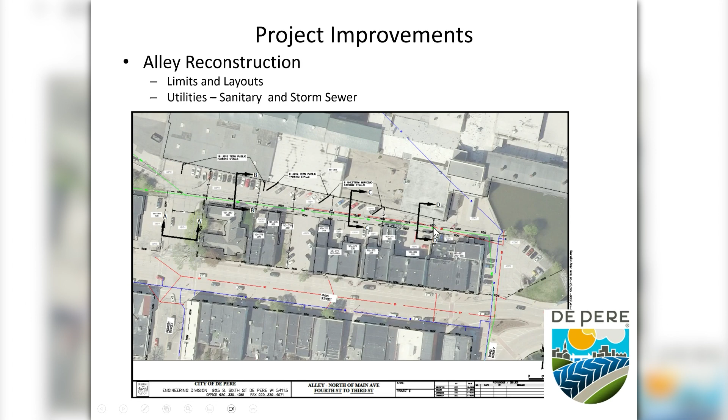Now, taking a look at the sections or viewing down the street, we've got a couple different ones, and the A, B, C, and D designate the locations of these upcoming pictures. But we're going to show you what we're dealing with from a right-of-way standpoint. So section AA is looking down 4th Street, fairly wide.

But section BB is one of the first sections behind the old library, viewing down the alley. And you can see our 12-foot right-of-way is showing the approximate location in black.

Really close to the curb along the old library and extending out into the pavement. So if we look at this as strictly reconstructing only 12 feet wide, you can see there's a lot of pavement we're not touching as part of the project.

Again, some of these we have lease agreements and things with the paper mill for parking, particularly along here. But when we get farther down, we don't have any easements or agreements for the parking on the south side of this alley.

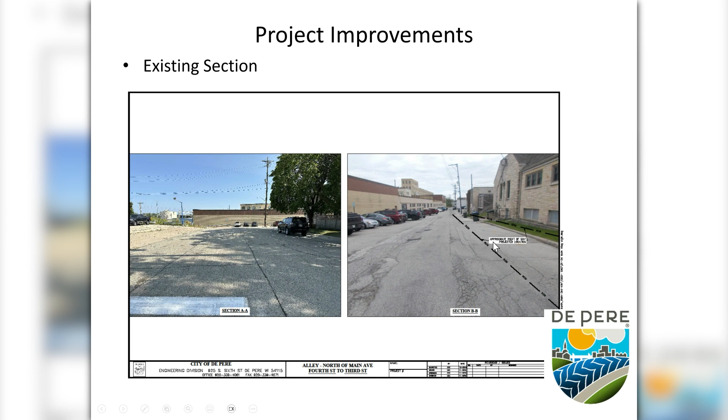Going down to the next, we're farther down mid-block, and then also when we get near the end of the mill towards the river. But again, you can start to see the right-of-way lines up pretty close to the backs of some of these buildings, extending partway out into the alley 12 feet.

In fact, the storm sewer where it's shown, if you go in the back where there's an inlet back there, that is outside of the easement or outside of our right-of-way. And there's a lot of pavement between our alley and your buildings.

So really the scope of this project is going to be dictated by the type of input we receive from the property owners and the businesses.

As I mentioned, we're going to be asking some questions. How do you use this? Are you looking at improvements in the future, maybe outdoor seating or things like that? Are you looking for pedestrian facilities? Are you looking for better lighting? And all those things come with pros and cons.

For us, if we're going to put in pedestrian facilities, we can't fit them in a 12-foot right-of-way without impacting the ability to drive. So we would need easements and agreements and things like that. And when we talk a little bit about dates, how elaborate this project gets may dictate how quickly this project goes. So those are some of the things we wanted to talk about today.

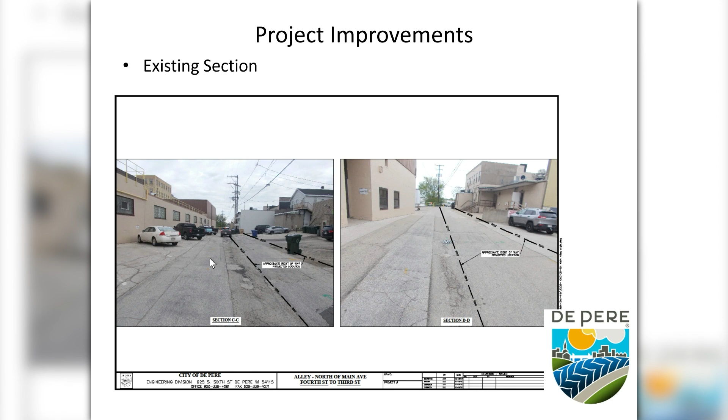So I mentioned a little bit that we are also talking about storm improvements and assessments. What we would be looking at is improving the storm, which I talked about runs in this low area, and then extending storm laterals towards your property. How far, we would have to work out with the property owners, but those things are assessed for. We want to present those up front so there are no surprises.

An assessment for the storm sewer—we only assess for the new storm sewer if we have to put new storm sewer in, and/or the storm laterals. So if you only have a lateral, and you've got storm sewer in front of your property, we would only assess for the storm lateral. If your property is already connected to the storm sewer somewhere, either behind the building in the alley or in front on Main, because there is storm sewer on Main, you would have no assessment.

We would not replace the lateral as part of the project if it's in good condition, and we would not charge you for it. That's something you can coordinate with staff on as this project starts to move forward and we know which direction we're going and how quickly it's being constructed—we can work with you and determine if you're hooked up or not. So that's something we can work with you on.

Now, as far as the storm assessment payment goes, with storm assessments we have a couple different options. When the project occurs—say, for instance, it went in 2025—at the end of the year, when the project is done, we would send you an invoice. At the time the invoice is sent out, if you want to pay it in full without any interest, you have to pay it within 30 days.

If you don't want to do that, there are payment plans. We have a 10-year payback option, 10 annual payments. Now, the other situation with this assessment is there's a long-term payback option. If you choose not to hook up to the storm lateral, and your building does not create icing problems from roof drains or sump pumps, we do not mandate hookup.

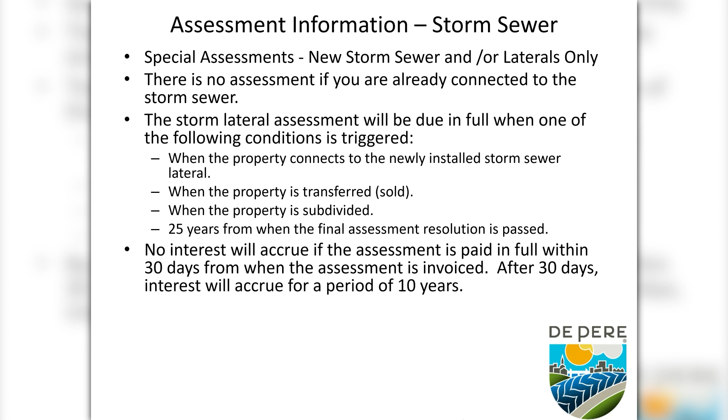So that is one of the two costs associated with the project. And before I continue on and hand it over to Scott to talk about dumpsters, because we are proposing a dumpster improvement with this project, I want to emphasize that the portion for the street improvements is not assessed. The sanitary lateral improvements that are made are not assessed. And then in a little bit, we'll also talk about water, because the water is located out on Main. Those are not assessed either.

So really, there's two assessments we're dealing with on this project: the storm, and the one that I'm going to turn over to Scott now to talk about, which is the dumpster enclosure construction. So Scott, I'll turn it over to you.

So what we're talking about on this alley project, over the last 6-7 years, the city has actually been installing dumpster enclosures in the downtown areas. This one right here is in the alley, a brand new alley we constructed recently between 3rd and 4th. I call it Cobblestone Alley because it was part of the Cobblestone project. The intent with these enclosures is we want to get rid of the unsightliness of the existing polycarts.

We've installed these enclosures. Our very first one we did was on the Nicolet Square parking lot. That was kind of called the pilot project. So those properties on the south side of Main between 3rd and 4th have been using that enclosure for, I believe, 6-7 years.

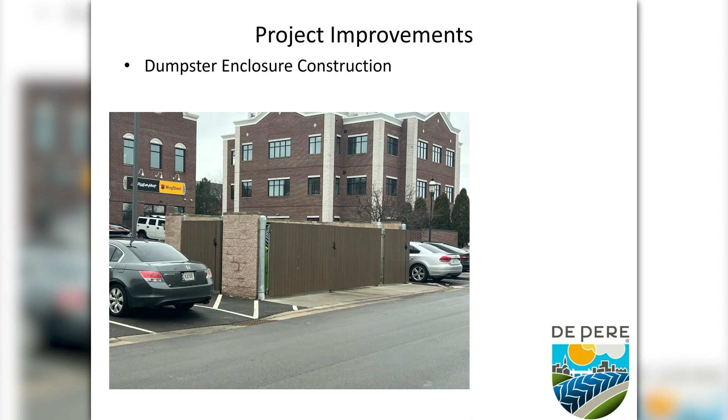What happens is, we build the enclosure and then we assess the property owners on an annual basis depending on their uses. We'll talk about that in a minute. So our goal, this is, I believe, Mill Alley will be our 5th area where we installed an enclosure. We have one right now at Nicolet Square.

Our second one we installed was Marquette Square. The third one, as you saw in a picture, was the alley between 3rd and 4th. We actually are in the process, and had information meetings earlier this year, we'll be constructing an enclosure on Mission Square. That's an area where Walgreens is.

And like I said, we're proposing this over the next couple of years when that actually does occur. Basically, what will happen is when we install that enclosure, we'll contract collection services with our private hauler. The city will administrate the garbage and recycling collection. Right now, I believe it's twice a week in most of the places that we have.

We also look at installing the enclosure large enough. If you're in an area where maybe a bar or something needs a larger container, we would actually construct it for that. Basically what we do is, for example, if a property owner wants to opt out, that means they have the ability to have services and store either carts or dumpsters on their own property. So basically they opt out, and then the city does not collect from it. It will be required to go private.

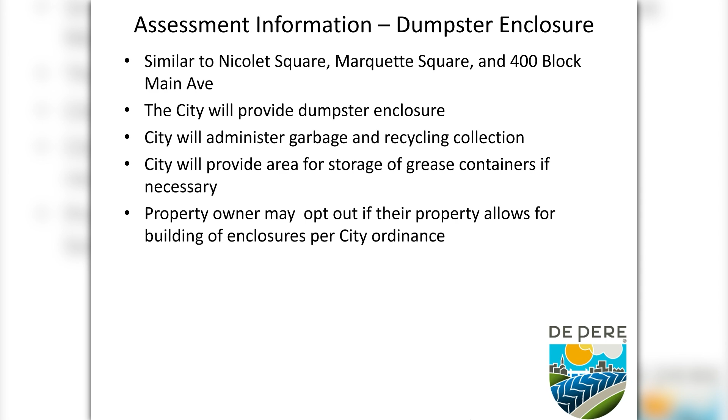An example, in the Nicolet Square area, I believe Pasquale's is one property owner. They have enough room that they opted out. I believe also the movie theater, for example, on Marquette Square, they opted out because they don't need it. So what will happen as part of this process, as Eric and his team are planning, I'll be working with them. We've got to figure out a strategic location to install the enclosure.

Potentially, it's going to most likely require a loss of parking stalls. I can tell you, in every instance where we install them, there were 2 to 3 stalls that were lost.

The toughest part is getting agreements on where we can put it and what'll work, then the issue is people actually using it if it's on one end of the parking lot versus another, or even the middle. There was a lot of debate in Nicolet Square. We were looking at two enclosures because of the bars and everything that were there. Where it went is pretty much behind the meat place, the market. It came to an agreement with all the property owners there, because at one time there was a business there, a bar at the corner of 4th and Main. They had to haul their garbage and walk it all the way over to that enclosure, quite a distance.

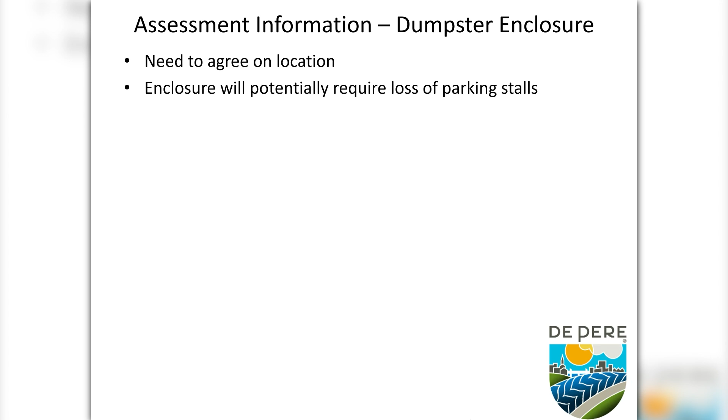An example right now on Marquette Square, we use George's. They walk it all the way to the north end of the parking lot. So there'll be some sacrifices on that.

So what will happen as we move forward and it gets constructed, we will have to revise our ordinance. We have an ordinance particularly for this type of application for a downtown area. You can see right now what we have up there is Nicolet Square, Marquette Square, and the 400 block of Main. We'll be adding Mission Square later this fall. Then as part of that ordinance, the Director of Public Works has to assess an annual assessment that goes on your property tax.

For this project, we don't know when that'll be because it all depends on the project. I'll give you an example: on Mission Square, it's not going to be done until probably late summer, early fall. So really the services won't start till 2025, and they'll go on our '25 property taxes.

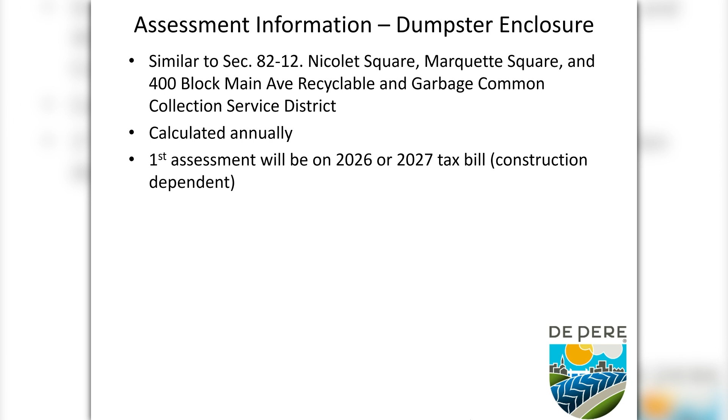So we got a little taste on the next slide, giving you an idea what the assessments will be annually. There's really two different types of assessment: those that have an office space, and now everything, you know, you might have a parcel that has maybe 3 or 4 uses, and say one use is a bar or a drinking establishment or a restaurant, then you get the larger assessment. In this case, for 2024, for those going out this year, the highest is 983.53.

And if you're an office building, such as you are, Ellie, because I think O'Connor has it on the south side, their assessment is 161.98. In fact, I believe she's on this one for the Nicolet Square.

So what will happen is as we build more of these enclosures throughout the city, it all goes in one pool. So everybody's going to be paying the same assessment, whether you're on the east side, the west side, in Mission Square, Marquette Square, or Mill Alley. Basically I throw all these parcels together, and everybody's paying the assessment.

Annually, I update them because, for example, if a restaurant bar moves out of a parcel - I say a parcel because a building like on the south side of Main between 3rd and 4th may have a restaurant bar, but there's also a couple of apartments or even office space - it's basically based on what the use is, office or a restaurant type bar. So there are some of these establishments that change hands and are no longer a restaurant type bar. There's an apartment instead, or they might be a gift shop. Well, then they actually will get a lower assessment.

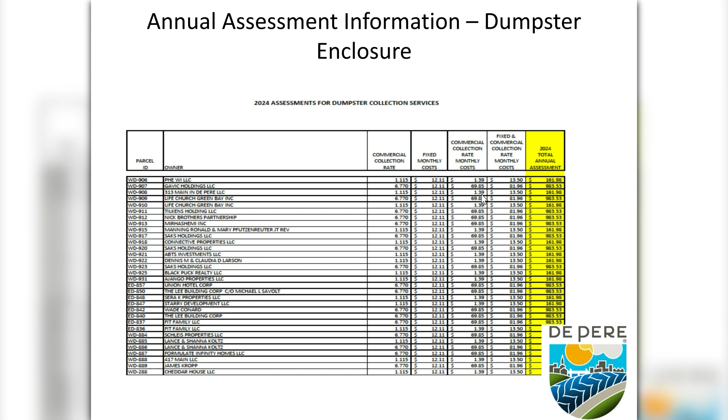All right, thanks Scott. So we're going to take a step towards the timing of the projects now.

So we just talked a little bit, in general terms, about the scope of the project, and then we'll talk more about the improvements with the dumpster enclosure and the two charges that are out there for this project.

But next, let's talk project timing. Quick overview: we've got a couple different projects which are the catalyst for when we want to get this alley done. Really, we're looking at this alley in either a 2025 or 2026 timeframe. 2025 would be if we just go with a 12-foot reconstruct on the pavement and we don't get to pedestrian facilities, or there aren't a lot of other amenities added, and we don't need to get easements, because as soon as we start having to get easements and rights to get onto property, things get more complicated. If that were to occur, it'd be 2026.

In preparation, we're going to have the Main Avenue utility relay by the city of De Pere in 2027, and then the big one, Main Avenue Reconstruction, in 2028.

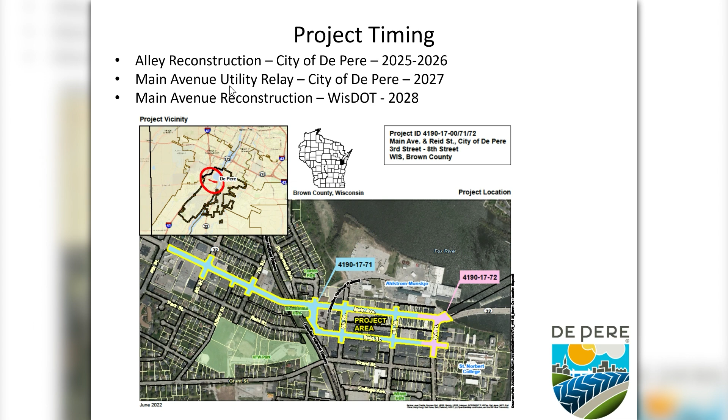I'm going to elaborate on those two other projects. So, 2027 utility relay: the year prior to the WisDOT big project in 2028, the city needs to come out here and redo our utilities. For those of you who have been in the area a while, it would be similar to 8th Street in the 2016-2017 timeframe.

In 2016, we did our utility work and put temporary asphalt patches down. In fact, I can still show you on our aerial maps what it looked like after we were done. And then WisDOT came in the year after.

On this project, you can see here's the area on Main that's impacted by the alley behind it. But in front, that's where your water main comes from. So we are proposing — there are curb stops, little metal caps for each of your buildings, out in the brick area — to relay those in 2027 to get into your building.

There will be quite a few meetings on that separately, because we'll want to work with your plumber to get that water service into your building so you don't have to deal with leaks or things like that in the future. But with that being said, during that timeframe, there's going to be impacts to traffic and impacts to people accessing your buildings, particularly when we're digging into these buildings.

Now, this project goes from the bridge all the way to 8th Street. So there'll be a lot of time we're not working in front of your building, but you can see there are quite a few services on this block. So there will be impacts in 2027.

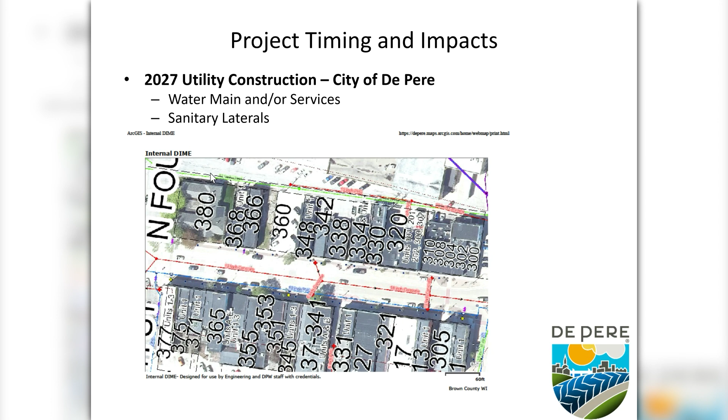Then comes the big one, 2028, and there are two different scopes to the DOT project. The area in blue, which encompasses at least half of your block, is going to be a significant impact — basically pavement replacement, decorative concrete, or whatever the city and community members come up with, and sidewalk replacement from building face to building face, which will make access into buildings very difficult during that time. This project is going to take the entire summer, I would anticipate.

Then there's a purple area, or pink area, depending on your color preference — I guess it's more pink — that's going to be more of a pavement rehab, because that concrete is newer and was constructed around the time of the bridge. So there will not be as extensive work there, although I'm not sure what's going to happen with the sidewalk, because I don't know that the city's necessarily going to put brick in, and we'll want the sidewalk and the furniture zone, where the brick is, matched throughout.

So really, this will be a big impact, and that's one of the things we'd like you, as businesses and property owners, to think about when we start discussing what we're doing in the alley: are there times during this 2028 timeframe that you're going to want to see people accessing your buildings from the back?

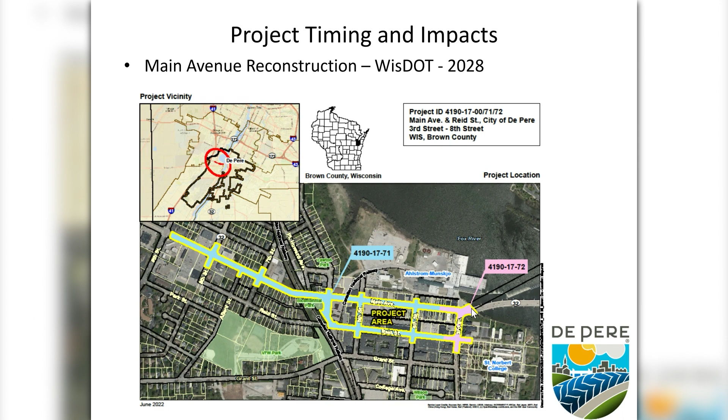We really don't know what the construction staging and traffic control plans are at this point. There's going to be a lot of impacts, so keep that in mind when you're thinking about this project. That is the overall timing. And again, just a step back, the alley could be 25 or 26, depending on what the amenities are.

At this point, I'm going to turn it over to Quason to talk about some of the other assistance things and other opportunities that the city has. Thank you. My name is Quason Shaw with the Development Services Department with the City of De Pere.

One of the assistance programs that we have is our Brownfields program. Earlier this year, the City of De Pere Development Services Department put together a request for proposal, an RFP, to contract with environmental consulting services groups, basically just to create a Brownfields program for us. So with the Brownfields program, we're looking at contaminated sites, soils, things of that nature.

One of the things we looked at in creating the Brownfields program is to assist the city. We have several properties throughout the city that we are looking to remediate. With this, we're creating our Brownfields program that will allow us to provide services for property owners to look into if you're looking to do a phase 1 or phase 2 environmental assessment.

One of the things with our Brownfields program, we will create a steering committee to help guide us in how we're going to determine the Brownfields program. So we're working with a consultant, Stantec. They're actually on Turing Road, here in the city, so they'll be providing the services with us. In that aspect, we'll be looking at doing remedial action plans, phase 1, phase 2, looking at assessments on different properties and things of that nature.

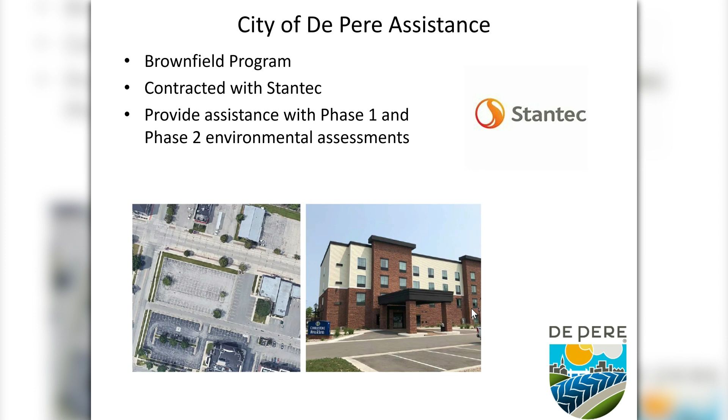And here on the screen, you can see an example of a Brownfields program project that we looked at. So looking at the cobblestone hotel there, looking at cleaning up that property. You see the before and after, where it's just a vacant parking lot there, and then now you have the hotel standing there. So that's one program that we have here with the city.

That's okay. The other one is our facade grant program. With the facade grants, we are looking to support the rehabilitation and renovation of exterior building facades in the downtown here in the city. With our grant program, we provide a one-to-one match. So for every dollar you spend of private funds, the city matches you a dollar up to $10,000, $20,000, or $30,000, depending on your building width. The grant is determined by the length of the building, measured along the total linear frontage of the adjacent public right-of-way, up to $30,000 per property.

If you look at our guidelines: building width from 1 foot to 60 feet, you're looking at $10,000 that the city will give to you, granted that you put in $10,000 as well. 61 feet to 120 feet, $20,000. Anything over 121 feet qualifies for the $30,000 facade grant from the city. In this program, you will have to have a couple meetings - you will go before the RDA, and you'll work with us at the Development Services Department.

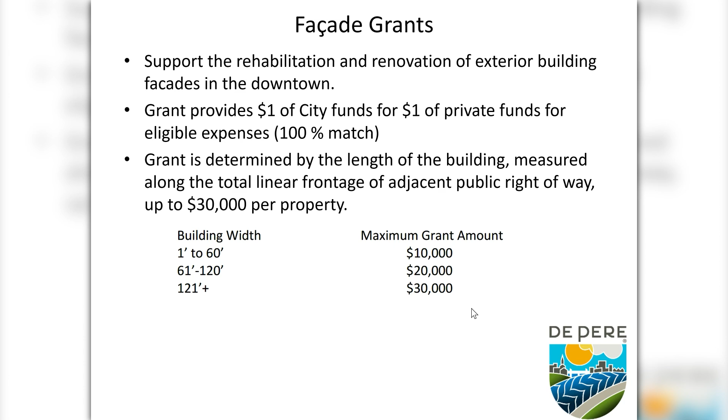We'll walk you through the guidelines and help you get your application and everything together. Then we'll present that to the Redevelopment Authority. They're the ones who administer this grant, and then ultimate approval comes from the Common Council with the City of De Pere.

Here are some of the eligible and ineligible expenses. With the eligible expenses, we have 16 eligible expenses there. For the ineligible ones, you can't use it for signage or any standalone requests, any improvement that could be removed from the building such as personal property. You can't use it for security cameras, interior improvements, design, engineering, or professional fees. And you cannot use it for roof repair, replacement, or anything that does not alter the appearance of the building.

If you look at the picture up here, this was actually 409 Main Avenue. On the left hand you'll see the before picture, and on the right hand side you'll see the after picture. This was one of the facade grants that was recently brought before the RDA for approval and completed. You can see the different contrast between the before and after pictures, utilizing the facade grants that we have.

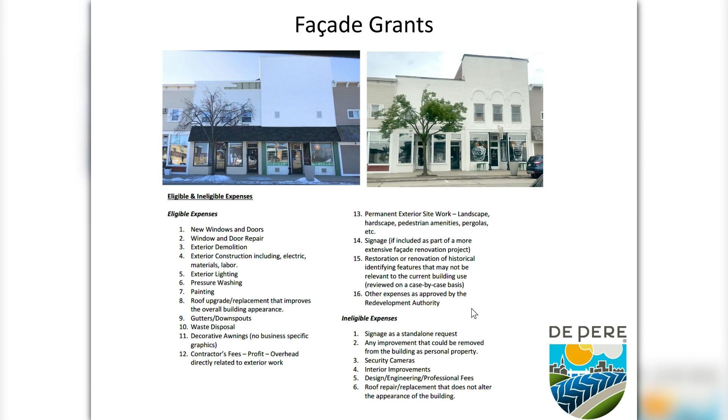All right, thanks Quayson, I appreciate it.

What I'm going to do now is open this up for some project discussion. I've talked about it a couple times already. I'll give you some information, and I'll scroll to the next slide after we get through this so you can see our contact information and write it down.

We're looking for answers to some questions: How do you use the alley currently? What improvements does your business or building need from this project? Quayson gave us some good information about exterior improvements - are you looking for things like that? Are you changing your building use? Are you going to use the back entrance?

Do you anticipate back entrance access for your customers, particularly during the 2028 construction project? Do you plan to add backdoor seating? That's another thing that would be important to know. And are you planning any improvements to your property near the alley - that can be asphalt, parking, things like that. So those are all the questions we have.

I'm going to leave this up. I think I'll pop out of the main screen here, but hopefully I can leave that up so you can still see it, and we will open it up for any questions or comments.